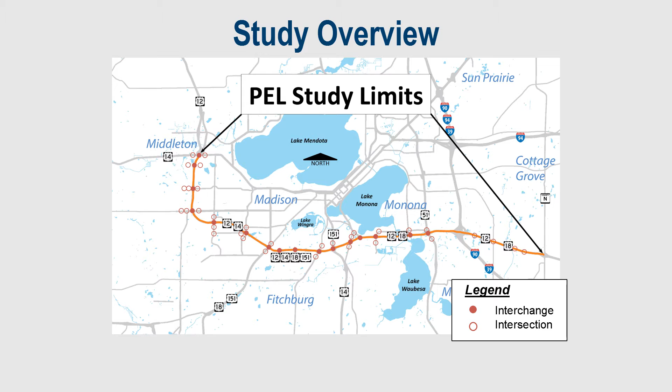The study limits begin at US Highway 14, or University Avenue, in the city of Middleton and extend approximately 20 miles south and east to the County Highway N interchange in the town of Cottage Grove. The Beltline study corridor carries more than 130,000 vehicles per day and includes 18 interchanges.

The goal of the Beltline PEL study was developed early on in the process through collaboration with agencies, municipalities, and other stakeholders. The Beltline PEL seeks to improve safety and multimodal travel along and across the Madison Beltline corridor in a way that supports economic development, acknowledges community plans, contributes positively to the area's quality of life, and limits adverse environmental and social effects to the extent practicable.

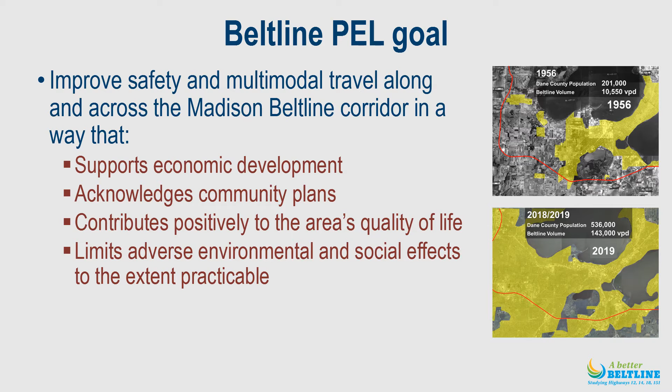With input from agencies, local municipalities, and stakeholders, 12 Beltline PEL objectives were also developed. These objectives focus on improving safety, mobility, and accessibility for all modes of travel on, across, or near the Beltline.

Here's an overview of the PEL study process. The first steps involved outreach and engagement. This included coordination with agencies, municipalities, and stakeholders to develop the study goal and objectives, create screening criteria, and identify potential improvements for the Beltline.

Using the feedback received, numerous improvement concepts were developed throughout the corridor for multiple transportation modes, including motor vehicles, pedestrians, bicycles, and transit. These concepts are called components.

After the public involvement meetings held in April 2022, the study team, again with input from agencies, municipalities, and stakeholders, worked to evaluate and prioritize the components that were developed and combine them into a range of potential long-term solutions called strategy packages. The strategy packages were presented at the June 2023 public involvement meetings.

At this point, the study team has developed a draft preferred strategy package. The preferred strategy package is what the study team would propose to carry forward for more detailed analysis in the environmental study phase, or NEPA phase, which is the next step after the PEL study is complete.

The next few slides provide an overview of the strategy package development process. Please note that the section of the Beltline east of the interstate was not included in the development of the strategy packages. Several corridor needs for this section were addressed as part of the US Highway 12 and 18 and County Highway AB interchange project, and a US Highway 12 freeway conversion study has identified some spot improvements that could be made farther to the east if the need arose.

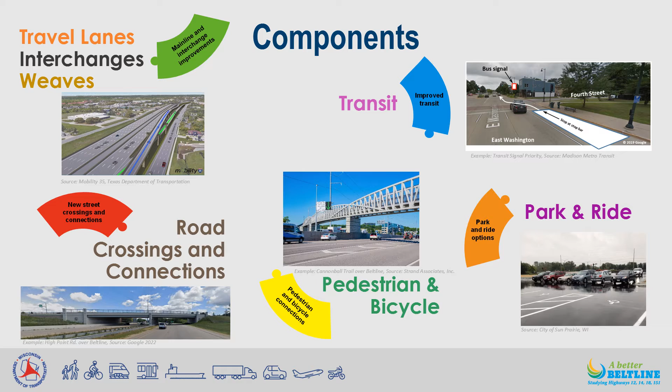The components were then prioritized to determine how they would fit into the different strategy package options. The components were generally prioritized based on how well the component met the PEL study objectives, the feedback received during outreach efforts, the potential environmental and real estate impacts of the component, and how well the component improves accessibility to nearby jobs or destinations. Typically, the more times a component was considered a higher priority, the more times the component was included in one of the strategy packages.

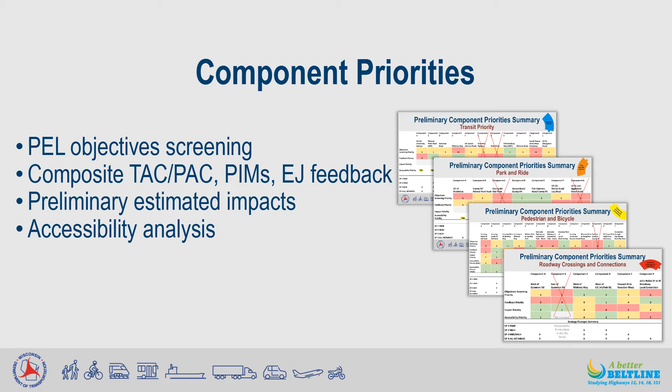On the other hand, if a component was considered lower priority most often, it was included in fewer strategy packages, or it was possibly proposed for elimination within the PEL study. From there, several strategy packages were developed that combined individual components to meet the PEL study objectives throughout the corridor.

They included different levels of improvement that range from a strategy package that keeps the Beltline as it is today, with only essential improvements and maintenance, labeled SP1 or the Preserve and Maintain package, to a strategy package that does everything needed to allow the Beltline to operate the best possible while offering the highest level of mobility and accessibility to all modes of travel, labeled SP4.

Each of the strategy packages, other than SP1 the Preserve and Maintain, builds on the previous strategy package. Strategy Package 2 includes only the higher priority components that were identified based on the screening criteria. Strategy Package 3 builds on Strategy Package 2 by including the mid-priority components as well as the high-priority components. Strategy Package 4 includes all of the Strategy Package 3 components while also adding the remaining components that showed promise.

After presenting and getting feedback on the strategy packages at the previous public involvement meetings, as well as completing additional outreach and analysis, a draft preferred strategy package has been identified for the corridor. The draft preferred strategy package includes improvement components that the study team feels should be carried forward and evaluated in more detail during future NEPA studies, and isn't necessarily what would be proposed for future construction.

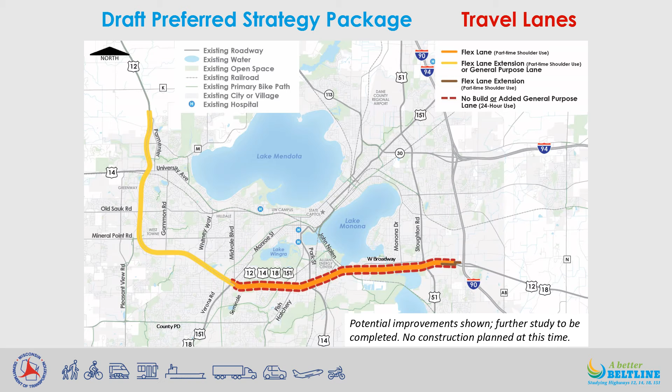The draft preferred strategy package includes weaving improvements at several locations that will be shown by yellow circles on the map. As mentioned previously, weaving areas are places where traffic entering the Beltline mixes with traffic wishing to exit at the next off-ramp. These areas often have safety concerns and are where freeway operations frequently break down.

Locations include both mainline directions between Old Sauk Road and Mineral Point Road, between Whitney Way and Verona Road, between Fish Hatchery Road and Park Street, between John Nolen Drive and West Broadway, and between Monona Drive and Stoughton Road.

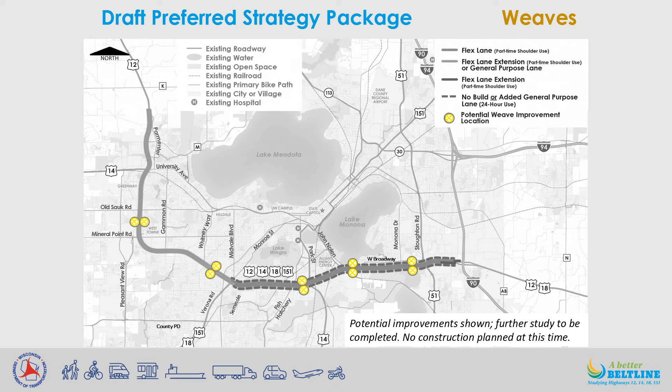The draft preferred strategy package proposes improvements at each interchange. Most locations are anticipated to be conventional improvements, such as adding turn lanes or through lanes at ramp intersections. These are shown with the darker blue circles on the map.

Locations where more substantial changes are being considered are shown by the light blue circles. These locations include Gammon Road, Whitney Way, Verona Road, and Stoughton Road. The Stoughton Road interchange is currently being evaluated as part of a separate Wisconsin DOT study.

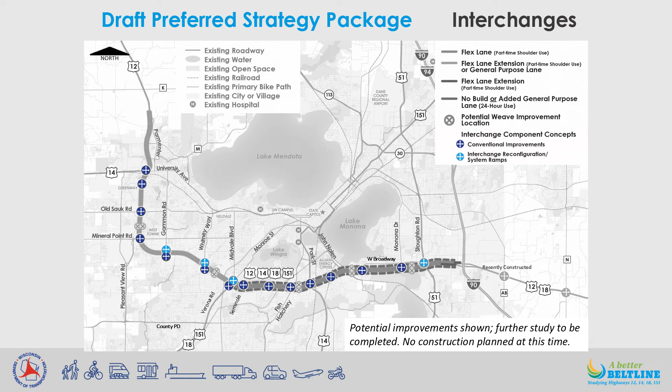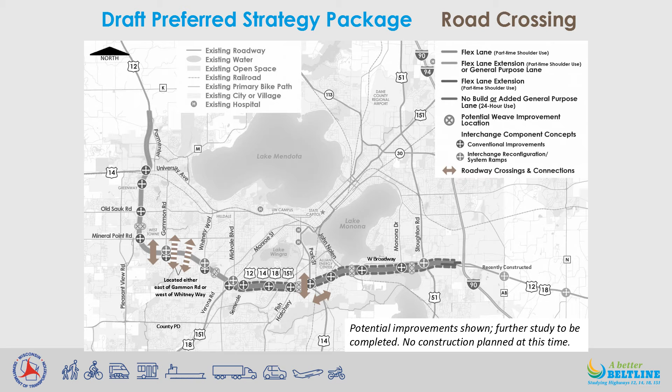Pedestrian and bicycle accommodations proposed for more detailed evaluation will be shown in green. In addition to the accommodations that would be provided on the roadway crossings just described, additional locations include north of Old Sauk Road, south of Old Sauk Road, an extension of the West Town Path from Mineral Point Road to Gammon Road, a crossing of Whitney Way north of the Beltline, a connection from Whitney Way to the Southwest Commuter Path.

A connection from Seminole Highway to the Cannonball Path, either north or south of the Beltline, shown by the dashed green arrows, a connection from West Broadway to the Lower Yahara River Trail through the Capital Springs Recreation Area, and a connection from Monona Drive to Stoughton Road and south to McFarland.

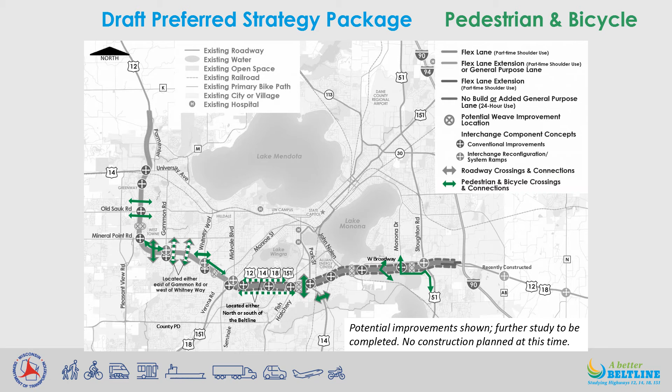Possible park and ride locations included in the draft preferred strategy package will be shown by purple circles. They include US Highway 14 or University Avenue at the Beltline, US Highway 151 or Verona Road at County Highway PD, Fish Hatchery Road at County Highway PD, and US Highway 14 at McCoy Road.

A park and ride near Mineral Point Road and Junction Road was previously considered in the PEL study and is currently under construction as part of the East-West Bus Rapid Transit project.

Finally, transit priority improvements are proposed at each interchange that currently has Metro Transit routes traveling through them. There are 9 total, outlined by a purple hexagon, with the highest priority locations being where Bus Rapid Transit service is anticipated to travel through the interchange. These are at Mineral Point Road and Fish Hatchery Road.

One option for transit priority being investigated would allow buses to pass cars lined up at traffic signals at or near the Beltline, allowing buses easier access through the intersections to improve on-time service.

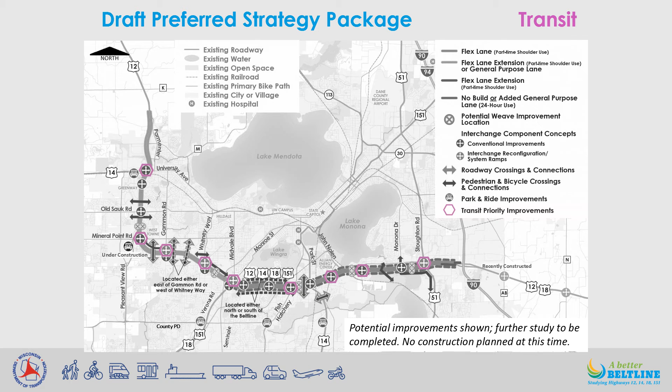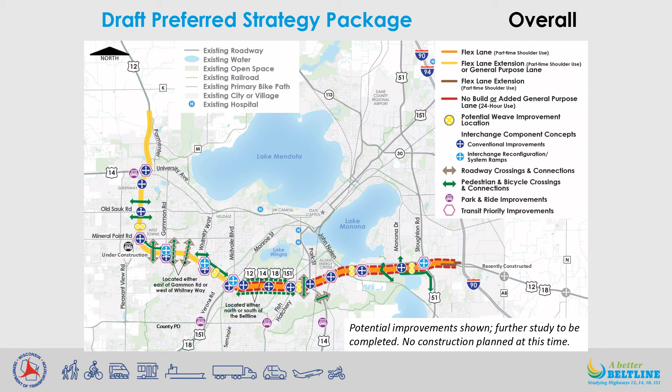This map shows the draft preferred strategy package in total. As mentioned previously, these are potential improvements that the study team feels warrant further investigation during future NEPA studies. It is not a preferred construction alternative. It is anticipated that changes to the preferred strategy package could be made during the NEPA process as the alternatives, impacts, and costs are reviewed in more detail and additional feedback is received.

As part of the Beltline PEL study, the study team investigated how the corridor could be broken up into different sections for future NEPA analysis and eventual construction to most efficiently address Beltline needs when they are anticipated to occur. Factors that influence timing of the NEPA studies include safety, traffic operations, and infrastructure needs in each section. Please note that Beltline needs may change over time, so the proposed sections and timing may need to be adjusted accordingly if new issues or needs arise. No construction related to the Beltline PEL study is planned at this time.

Based on the analysis completed in the PEL, the Beltline is proposed to be separated into 3 logical sections for future NEPA studies. These include the section of the corridor west of Verona Road from University Avenue to Whitney Way, shown in blue, which could be proposed to move into a NEPA study in the mid to late 2020s based on safety and operational needs. In the Verona Road area, shown in green, the Wisconsin DOT is currently evaluating near-term options

to help ease congestion at the Verona Road interchange due to rapid growth in the Verona area. Long-term, a NEPA study is warranted for the larger improvements identified in the PEL to fully address these issues. The timing of a long-term NEPA study will likely be dependent on whether the near-term options being investigated move forward and how effective they would be at addressing the congestion issues, but it is anticipated that a NEPA study for long-term improvements wouldn't begin until the 2030s.

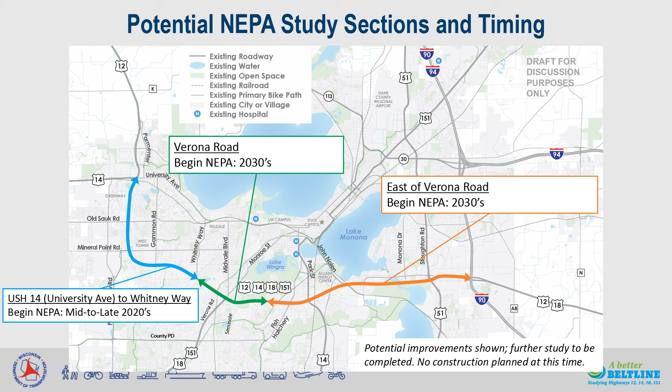For the section of the corridor east of Verona Road, shown in orange, a NEPA analysis for long-term improvements corridor-wide is not expected to be needed for several years, likely sometime in the 2030s. The Beltline Flex Lane has addressed many operational issues, and the initial safety results are promising. The Wisconsin DOT will continue to monitor the Flex Lane performance to see if these trends continue. It is possible that spot improvements may be needed in some areas before completing a corridor-wide NEPA analysis.

Moving on to the next steps for the PEL study. The feedback received from these public meetings will help determine what changes, if any, should be made to the draft preferred strategy package.

Those updates would be made over the next few months, and then the results of the Beltline PEL study will be documented in the draft PEL summary report, which is anticipated to be completed and published on the study website for public review and comment in the late summer or early fall. The final PEL summary report is anticipated to be completed later in fall of 2024. This would complete the Madison Beltline PEL study.